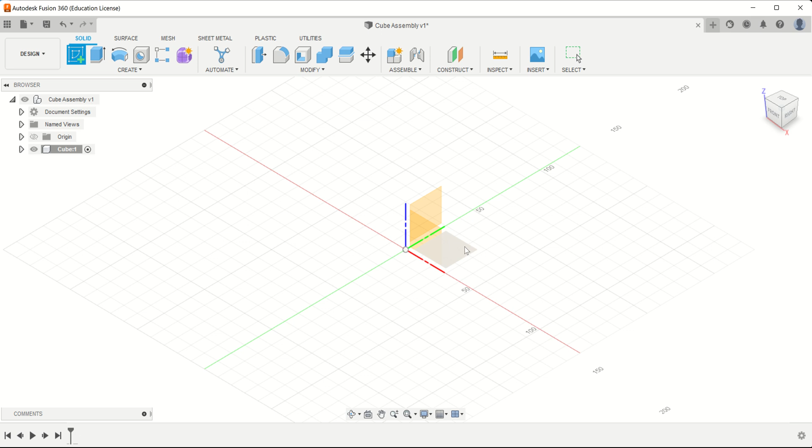So at this point we just need to make sure that we're inside the cube. Then we're going to go ahead and sketch. We're going to sketch a 30mm rectangle using the center point to give us a square. So 30 tab 30. Finish the sketch,

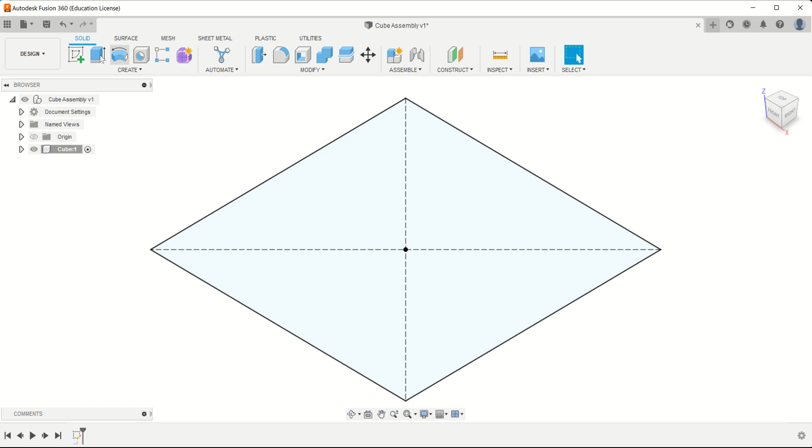and then we're going to extrude that. We're going to go symmetrical, overall distance 30mm, so it's going to go up and down 15, and we're going to hit OK. Just going to scroll out a bit. So what we've got now is a cube inside our assembly, and it's 30mm on all three sides.

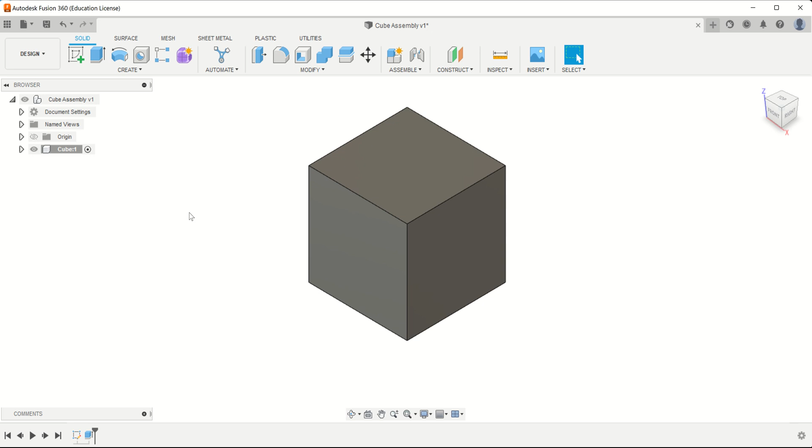At this point we're going to apply some material to it. So we're going to right click over cube 1, click on physical material, scroll down inside metals, and we're going to pick gold. If I can find it in the list, there we go. So you left click, hold, drag that material onto your part. Okay, so this part now has the physical properties of gold.

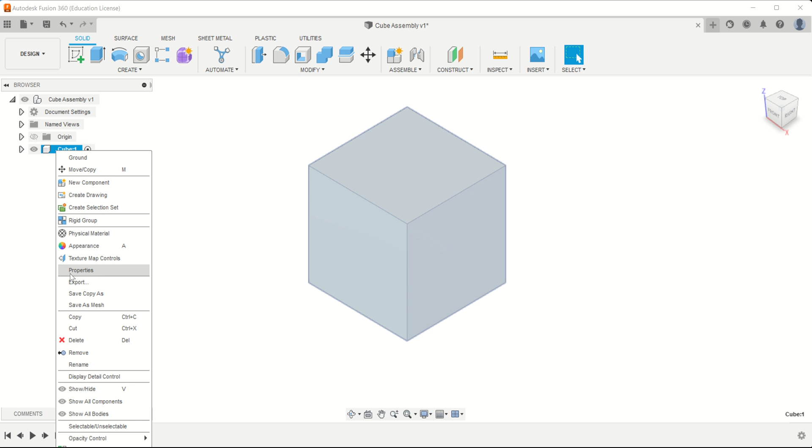So right click properties, it's just telling us some information about the part. If we click in the physical tab, you see that it's got a mass of 521 grams. So now you know a 30mm cube of gold weighs just over half a kilo.

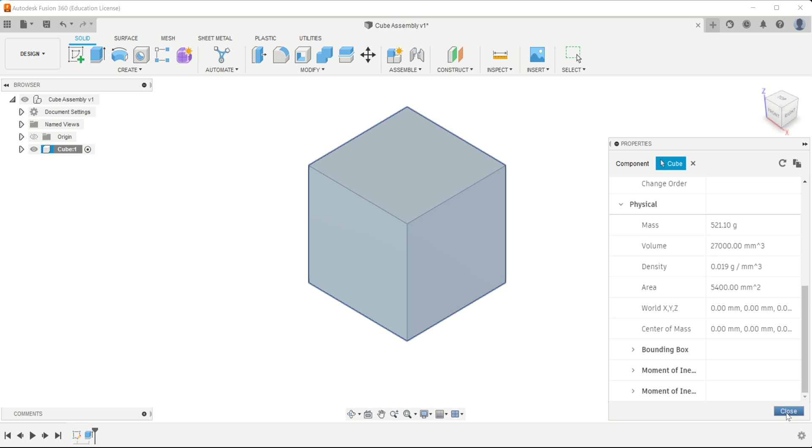Okay, so we're just going to go back up to the assembly now. Okay, so back up at the assembly point. On cube 1, we're just going to right click and ground. So what this has done is this has physically nailed this part into our assembly, so it will not move. Whenever you're doing assemblies, you just need to make sure that one thing is pinned down, otherwise everything will move all over the place. And again, at this point we're just going to hit save.

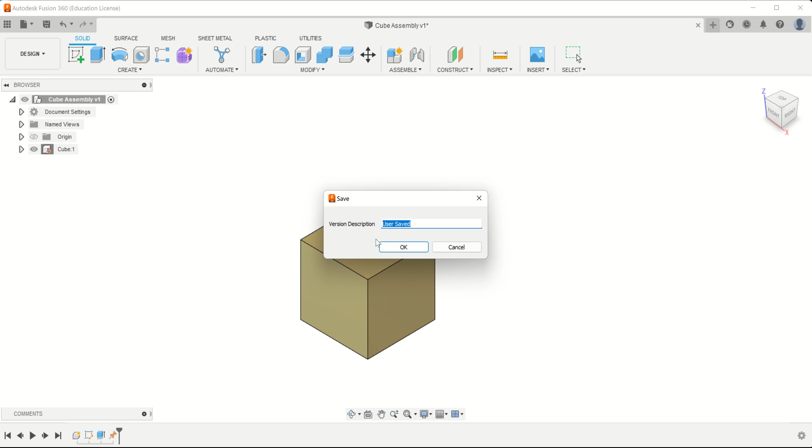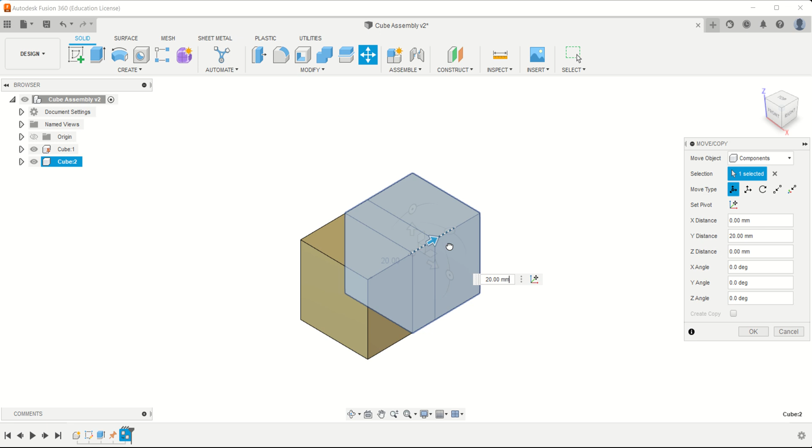Right, so what I want now is a second cube, so I'm just going to right click on the first cube, copy, right click, paste, and now I've got a second cube which is directly on top of the first cube. So look, I've got cube 1 and cube 2, and they're both sitting on top of each other. So for now I'm just going to slide the second cube off and out to the right and hit OK. So now I've got two cubes.

If I right click on cube number 2 and click material and go and find something like, there's a nice coloured aluminium there. Okay, so we've got red anodized, and drop it onto the second cube, you'll notice that the first cube also changes. And what I've done here is change the material of the part from gold to aluminium. So I'm just going to click off of that and just undo that. And now they're back at gold.

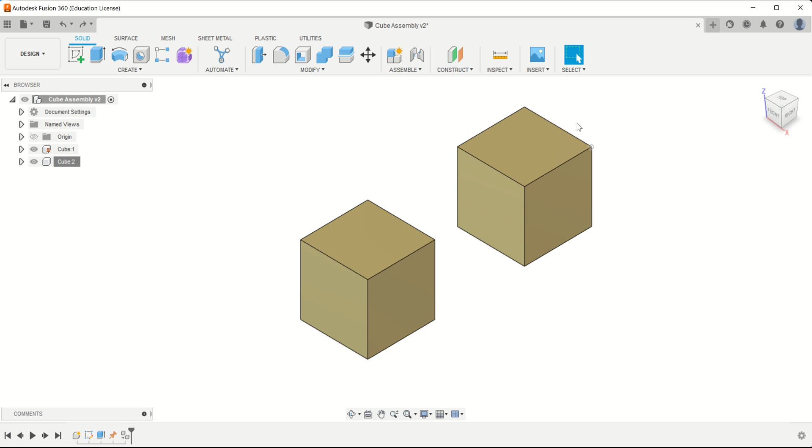Now if I want this part to be a different colour but still be gold, what I actually need to do is to change its appearance, not the material. So I can click on appearance, and again I can go and find inside the metals aluminium, and I can drop that aluminium, but this time it's only the colour it's applied to. It's like taking that lump of gold and spraying it with paint. I mean, you probably wouldn't do that, but we're just doing this so that you can see the difference between those two cubes.

Right, now what we want to do is attach this block to the side of this block. So we do that through this button here called joint. It is down here and got the keyboard shortcut J, but you can click it either way. So what it wants us to do is, on the first part, which it's highlighted itself, is to pick a face and like a point of which it's going to join.

Now the best way to find out what this does is just by clicking on a face and clicking on these various points, and in a second you'll see what happens. But I know I want this face onto the one on the other side, so I'm just going to pick this middle one. If it's a bit hard to select, you can just click on the face and then click on the control point, or if it's a bit easier you can just do it all in one go, so it's just dropped onto that control point now.

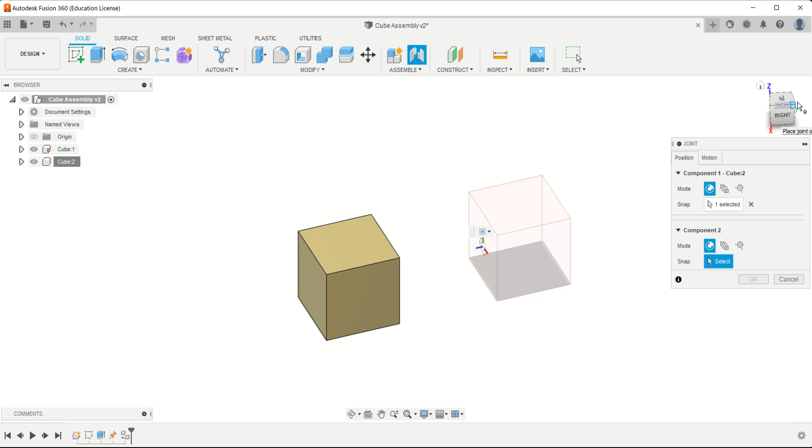Okay, now it wants me to select the other cube. I'm just going to spin it round and I'll do the same on the other side. Okay, so at the moment it's going a bit crazy. So what it's actually doing, where I've been playing with it, it's going through all the options. So let's just go back that way around. Okay, so the first one is rigid, which means it stays in the same orientation it was when we brought it in and just locks them together.

The second one is revolute, and this is where the control point comes in, because I picked the center of these two faces, you see it's actually spinning around them. I can change the axis and it is still spinning around that control point, but you just need to change the axis into the one you want. Now, ultimately we do want this rigid one, but we'll just go through the others and check. So this one slides along that axis, slides and rotates.

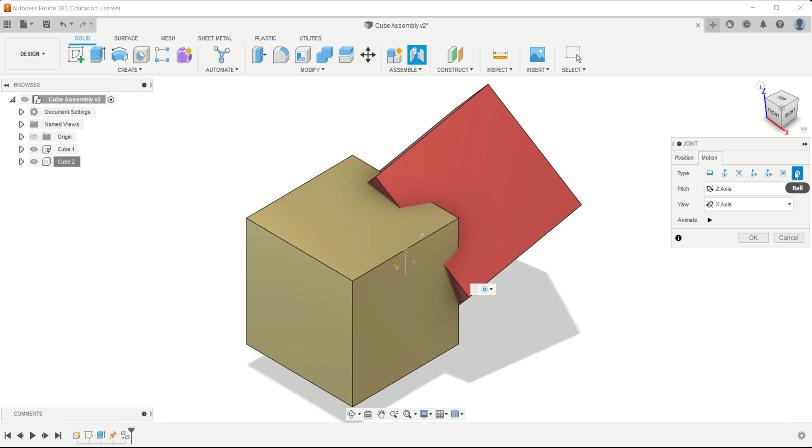This one's called pin slot, so it just moves along a set line. This one sort of goes all over the place, and this one just totally sort of 360 around that control point. So I suggest at this point you just have a play with these control points, picking corners, midpoints and stuff like that, just to see how it works. That's the best way. But for this one we're going to select a rigid one. It does that little shimmy and it's got the symbol here. You can change them here as well.

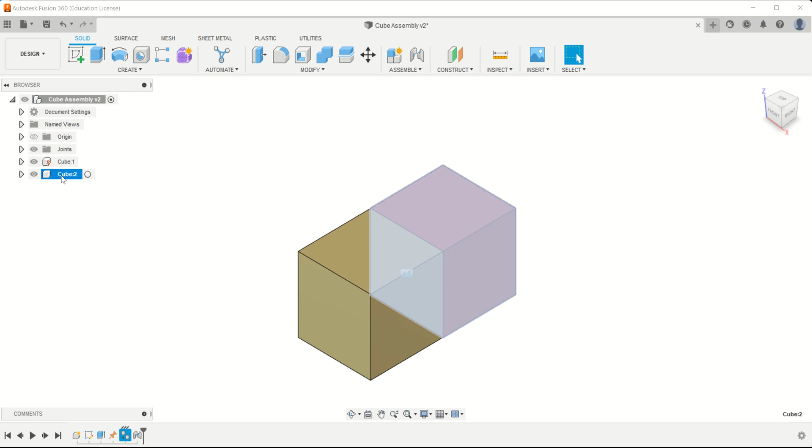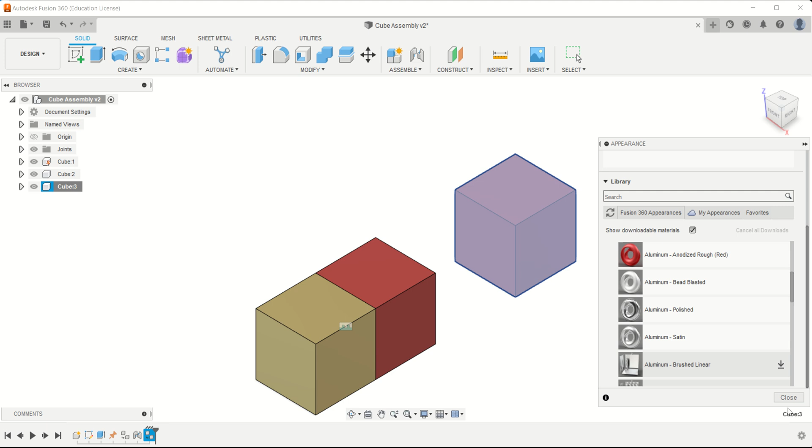Okay, so let's just zoom out a bit. I want a third cube now, so I am just going to copy it and paste it. And again, because I copied number 2, it's sitting on top of number 2, so I'm just going to slide that one out of the way. And again, I'm just going to change its appearance, its colour, just so it makes it a bit easier. Let's come down the list. Blue one, so it's still gold, but this time it's been sprayed blue.

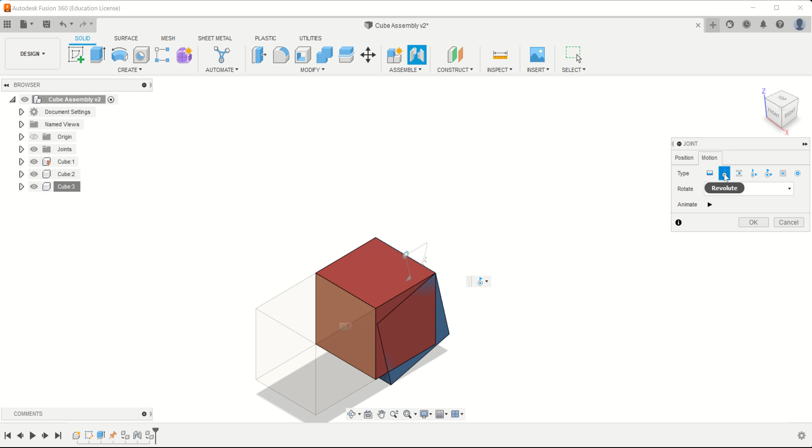Now what I want this one to do is I want it to sort of pivot around this edge here. Okay, so select the joint command. This time I could click on the face and then the edge, but I want to pick on the edge and then that midpoint, and then do the same on this side. Okay, so this is the rigid. Again, we'll just go through these quickly. So this is the action I actually want, revolute, but you get slide, cylindrical, all the options again. But this time I want revolute. And I'm just going to hit OK.

So what happens now is if I move this, it spins. Okay, but it has ghost-like properties. Now, this is where the software gets a bit clever. If we know that these are solid blocks and we want them to hit the red block so it doesn't move anymore, I need to create what's called a contact set. And I could just turn everything into a contact set, but it just means that the computer's always working out if every part is hitting something else. And in large complex assemblies, that isn't good for our computers.

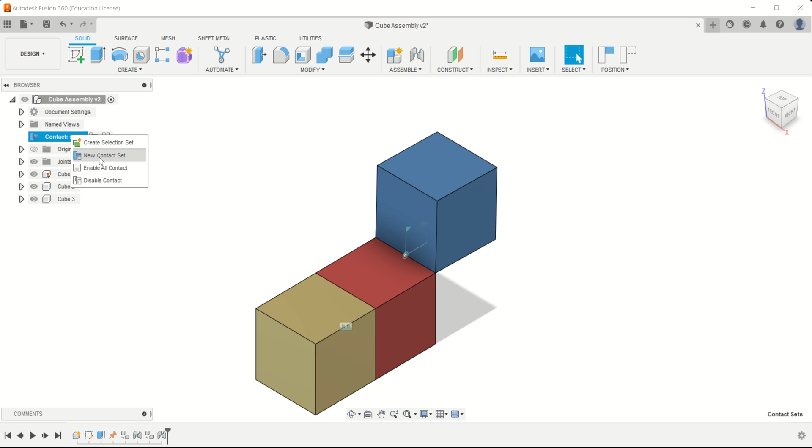So what we actually want to do is enable a contact set. And up here we've got contact sets now. And what we want to do now is inside of this is right click and create a new contact set. And all it's doing is saying, don't calculate everything, just calculate these two parts only. So they're now in a contact set. So as I move it now, it bonks into the other part and it knows it won't move. Okay, at any time you can turn it off and then turn it back on again. So I'll just leave it like that.

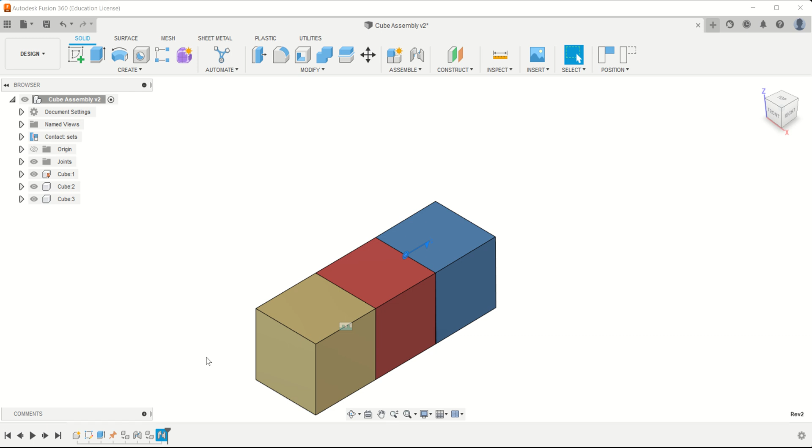Now, if I wanted this part up at a set angle, what I can actually do is just jump into here, right click, edit joint, and I can update this angle here. So it went 45 degrees and went down, so I just go minus and that'll go up.

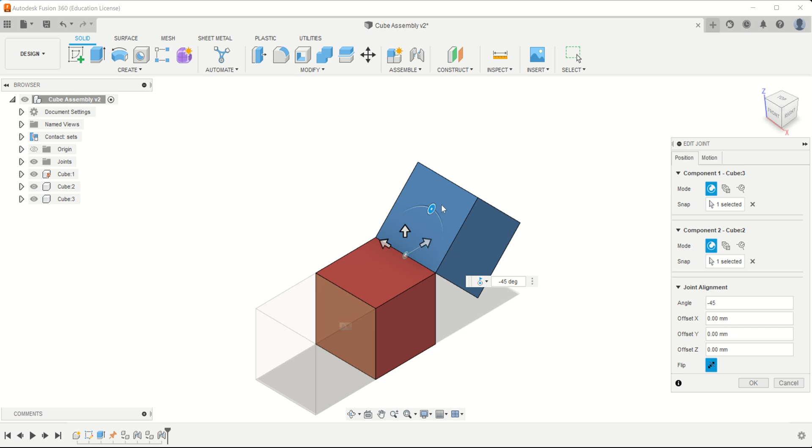If your red cube moves instead of your blue cube, you just need to pick these points again in the opposite order to what you did before. The computer just works out which one was the first part, which one was the second part. So if your red cube moves, then just cancel it and select the parts in the other fashion. Okay, so now this block is at 45 degrees.

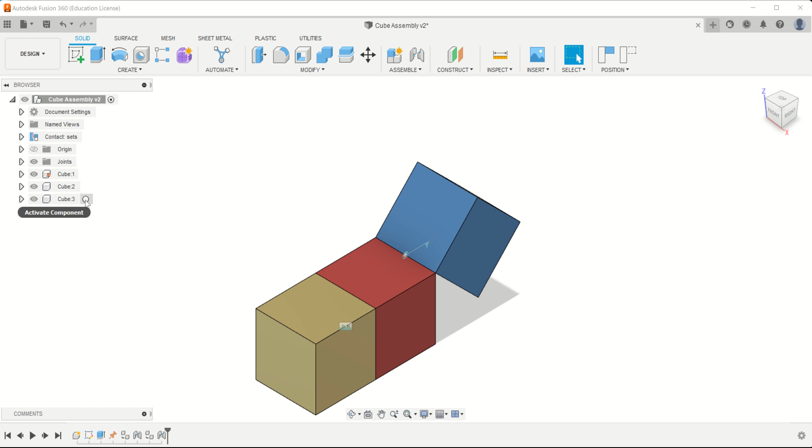Okay, so we're still up here in assembly, but what I want to do this time is add another feature to this blue part. So I'm just going to come down in my tree and activate this blue component. The other one's been greyed out now. So what I want to do is create a sketch on this face.

Just reverting positions. Revert and capture positions is when you've moved stuff. You can capture that new position, but we always just revert back to the ones we've set in the tree.

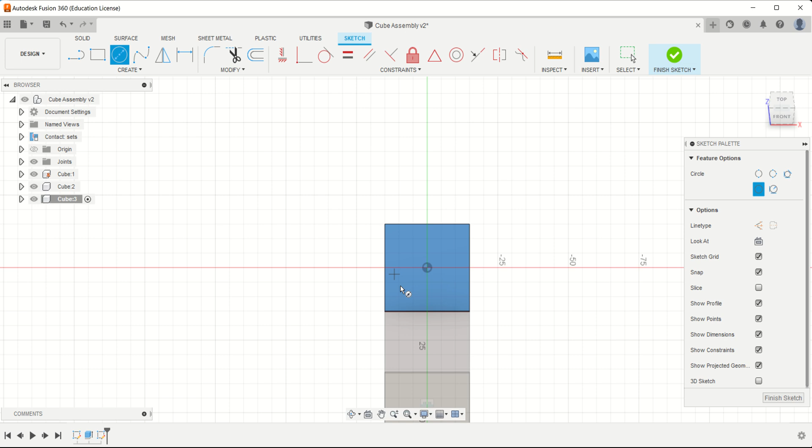Anyway, so I just want to draw a 20mm circle, finish the sketch, and extrude it. But what I want to do is cut. So I'll just slide it the other way, and I want it to go all the way through.

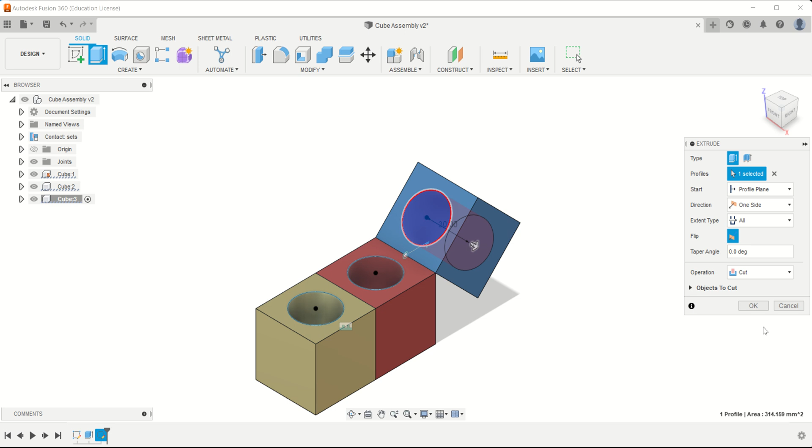Now, you will notice that the sketch and the extrusion have appeared on the other parts because they are all the same part, just 3 different copies of it. So it's 1 cube colon 1 colon 2 colon 3, just means the same part, and we've got 3 instances of it. So there we go, I've added a hole to all of the parts.

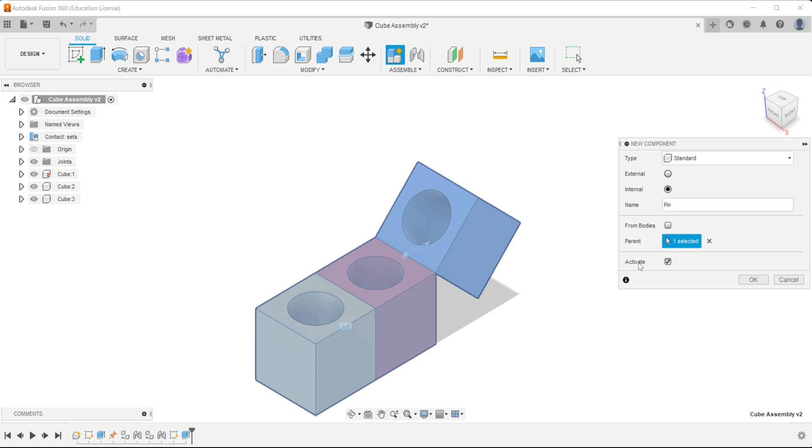So now I'm just going to jump back to the assembly, and now I'm going to create another component, create new component, and we're going to call it pin. By default it's going to activate it straight away. So here we go, I'm going to drop down into here.

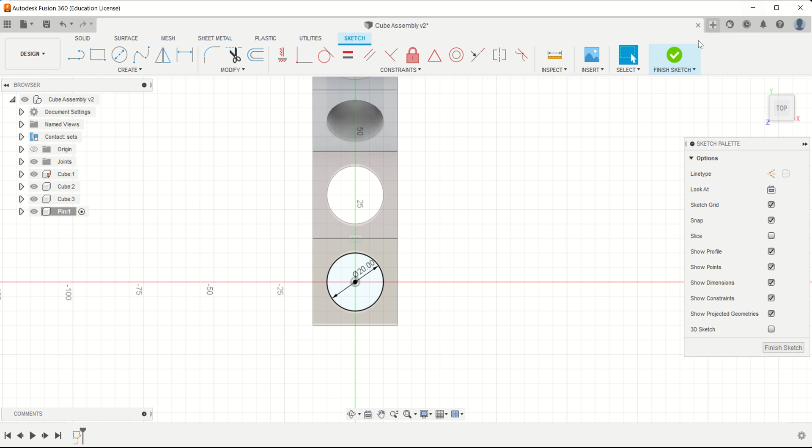Again, I'm going to sketch on the XY plane. I still want to use this center point that we created before and just forget about the parts you can see underneath. So once again, I'm going to create a 20mm circle, and extrude that straight up 30mm.

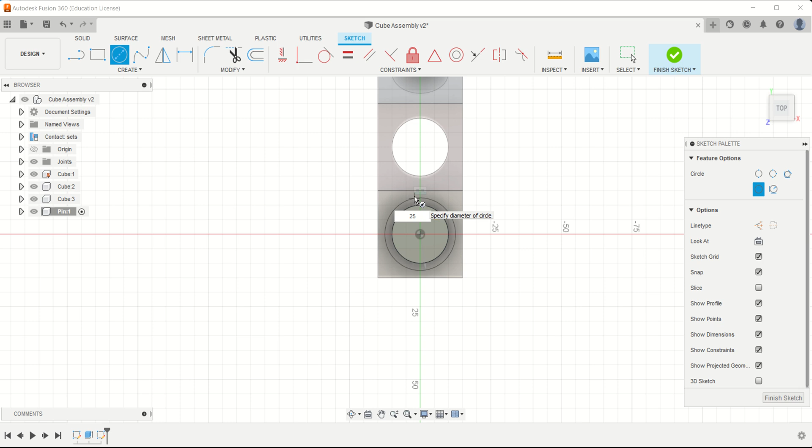And another sketch on the top, and on top of this one another circle at 25mm. Finish the sketch, and I'm going to extrude both the outside bit and the inside bit just up 5mm.

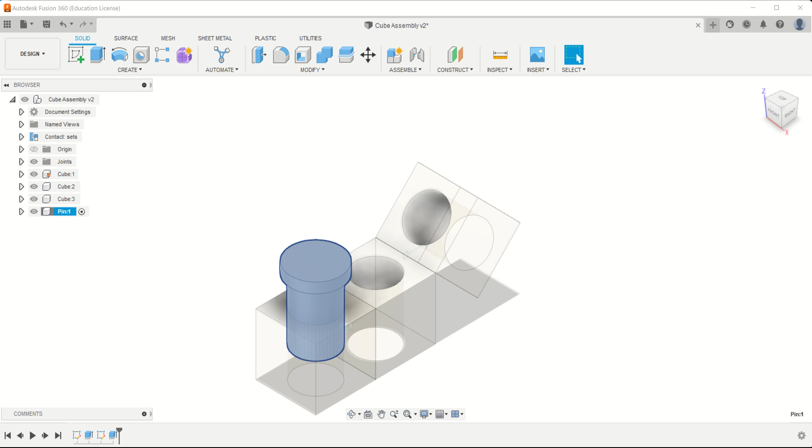Okay, again at this point I want to apply a material to the whole part. We're going to do a plastic this time, so close metals, open up plastics, and go down to find carbon fibre reinforced plastic. Left click, hold, drag, and let go. It's just got some texture on there now so we can see it moving.

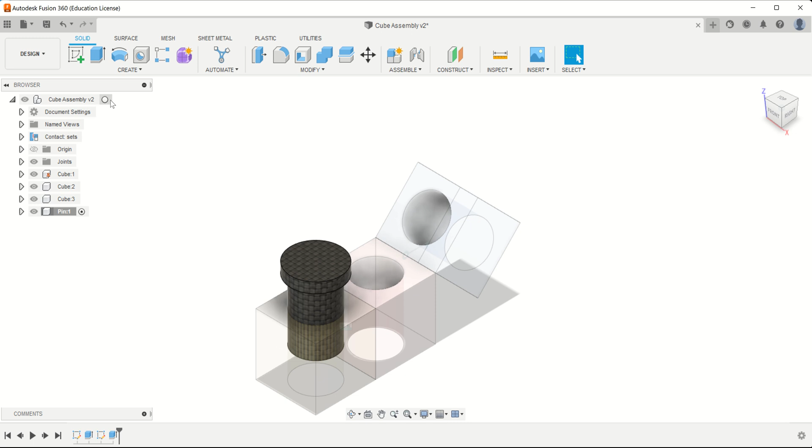And again, I'm going to move back up to the assembly. So although I drew it there, it will move. What I want to do now is put this pin into this hole.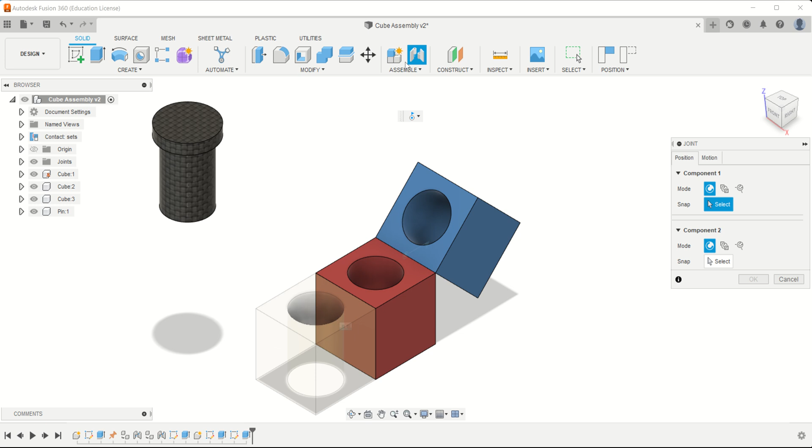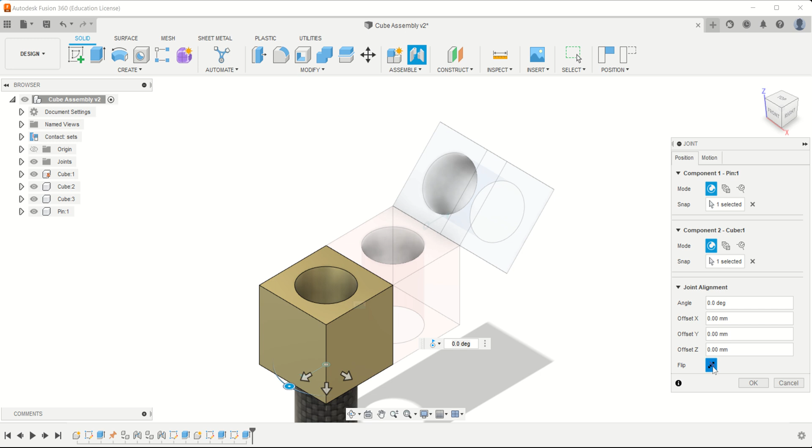So again, we're going to do joint. It's pre-selected the pin first. I'm just going to spin it around till I can see underneath it. I'm going to pick the bottom of that hole, and then I'm going to pick the bottom of the hole here. Now if it went the wrong way round, which it does sometimes, you can just pick the flip button. It just flips it round, but now it's doing what I want.

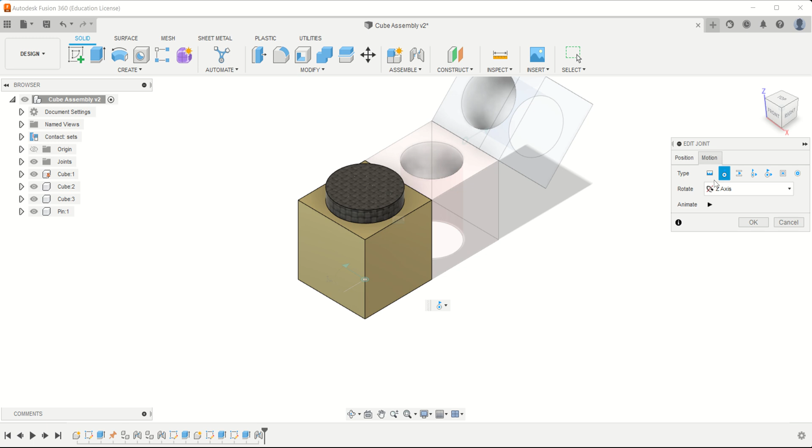Okay, so now I've put that pin in the hole and you see it spins, and that is because it's still left on Revolute. Now always remember what you did last, so if you did a rigid before, then that pin won't move. So just bear in mind, just double check what motion was set before. Okay, so we want another pin now.

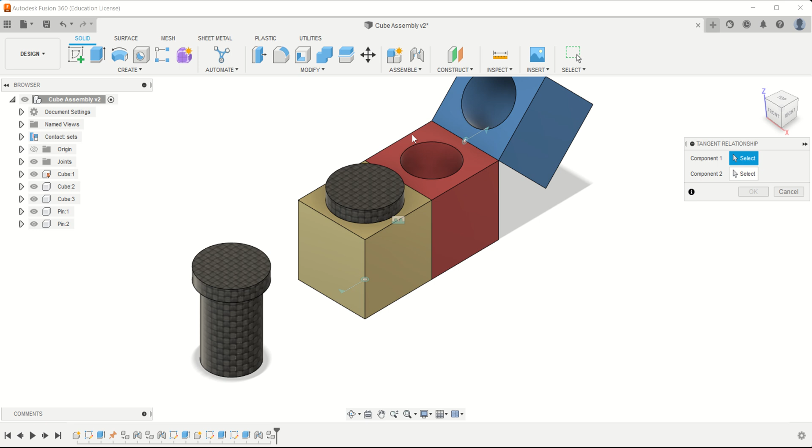Copy, paste. Again, it went straight on top of the other one. So this time what I want to do is get the round part of this cylinder touching the flat face, and that's actually a tangent, and there's a special button for that now, it's called tangent relationship. You just need to pick something flat, something round.

Okay, so now that this part... I'm just going to go revert. Get it back there. Revert position. Now to stop it flipping, what I want to do is keep these tops flat.

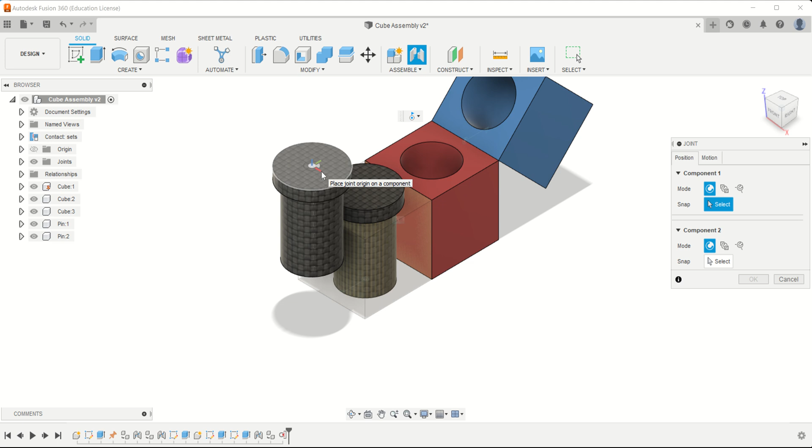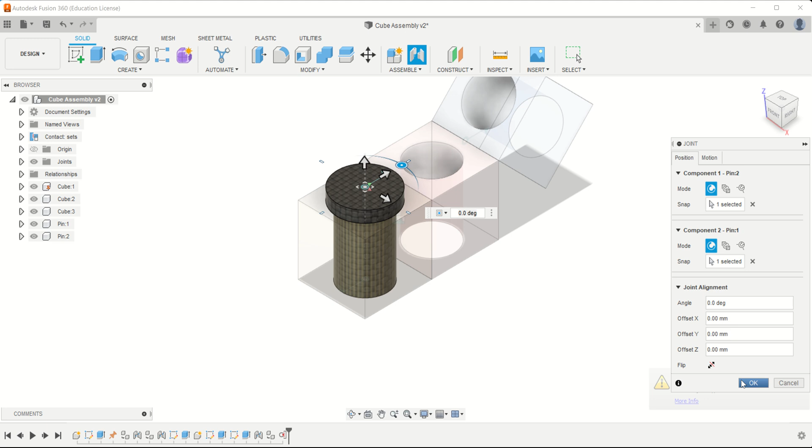So I'm going to create a new joint, select the top of this one and the top of this one. Remember it was on revolute before. I think it's not slider, planar. It's upside down. We'll just flip it over, and now it should be tangent to that face and just in line with the top, to stop it flying off.

Don't forget to save it, and that's how we go about creating assemblies.